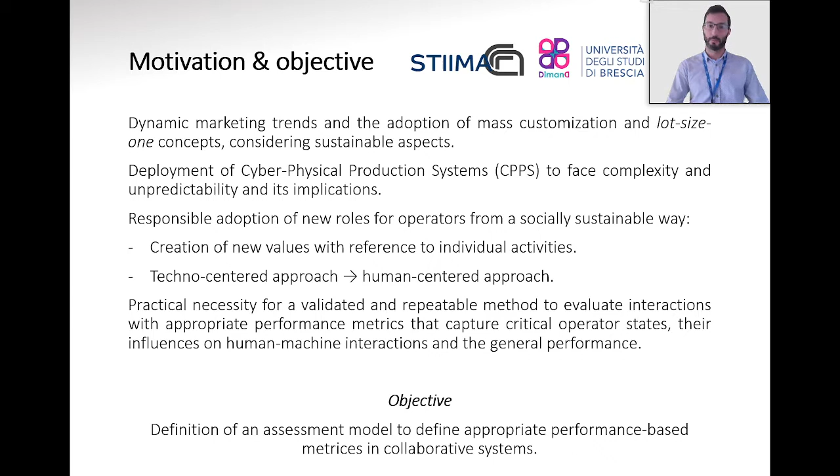That said, the main objective of this work is the definition of the model that helps establish performance-based indices in collaborative systems. Even though the approach might be applied to any collaborative CPPS scenario, we focus on collaborative environments implemented by collaborative robots for the physical interactions.

The model we propose is divided in different dimensions: the user, the machine, the collaboration, and the performance indices important for the production. Following slides will explain in detail all these dimensions and why they are important when setting performance indicators, and a practical point of view, which might be understood as how feasible it is to measure them.

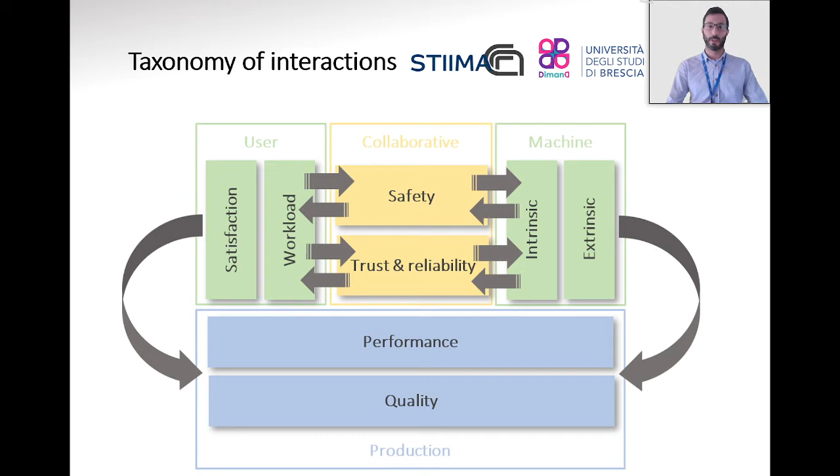Firstly, according to the user dimension, the context plays a major role since it establishes the engagement of the operator with the specific task. Then we can define the operator fatigue as one of the main factors that influences productivity and safety, and is directly related to the balance of workload while preserving the situational awareness.

Workload can be classified in physical and cognitive, or computational when considering artificial systems. Physical workload can be easily measured by monitoring physical operations, but cognitive monitoring is not easily addressed.

Situational awareness is defined as the ability to perceive what is happening around to predict what will happen in the future, and is driven by the supply of attention resources, their demand, and the operator's understanding of the task. It results in internal challenges of mental models and has a strong effect on the decision-making process and consequently on the production performance.

According to this dimension, different approaches can be used to measure these indices, like the multiple resource model architecture, the situational awareness rating technique, or the widely known NASA TLX.

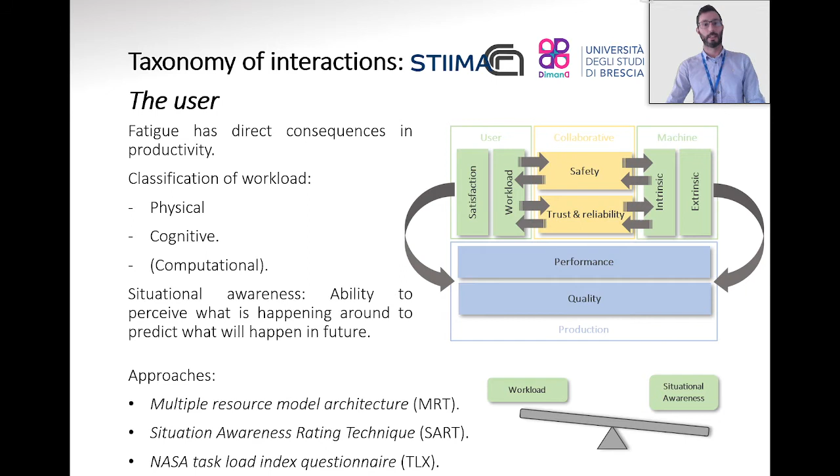According to the machine dimension, we might classify main indices in global or local, kinematic or dynamic, and intrinsic or extrinsic to the task that is performed. Challenges arise from the proximity to low performance configurations or singularities and the effective use of the workspace.

Some of the main indices are joint performance indicators, manipulability indicators or redundancy, and isotropy and task related, like the ellipsoid isotropy or the layout conditioning index, and others.

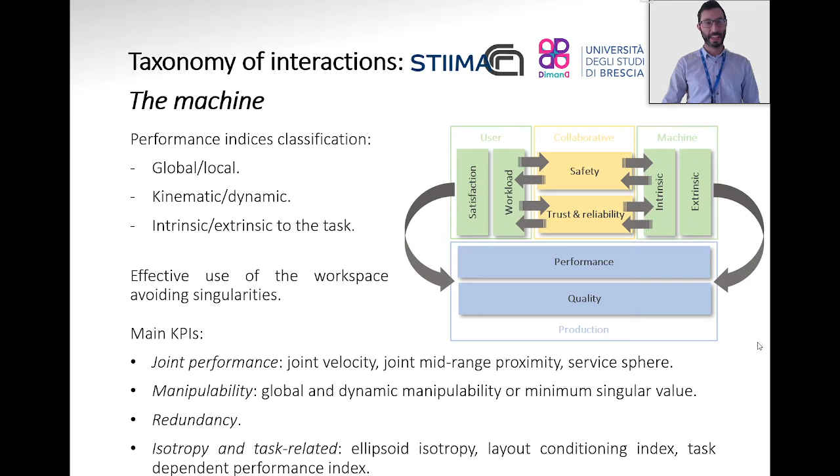Trust is the main pillar in collaborative interactions and is defined as a cognitive attitude that holds the belief that the collaborator will perform as expected to accomplish the main objectives. An improper calibration of trust produces system disuse, misuse, and may cause accidents.

However, the importance of trust is also due to the sources of its creation, which might be human-related, like the abilities and personal characteristics, robot-related, such as the performance or attribute factors, and from the environment, like the collaboration and task-related.

Some approaches to measure trust suffer from intrusiveness by using questionnaires and then affecting the results, or the use of automatic psychometric instruments. This last approach is quite promising, but the dynamic behavior and long-term changing nature of the familiarity process challenges this method.

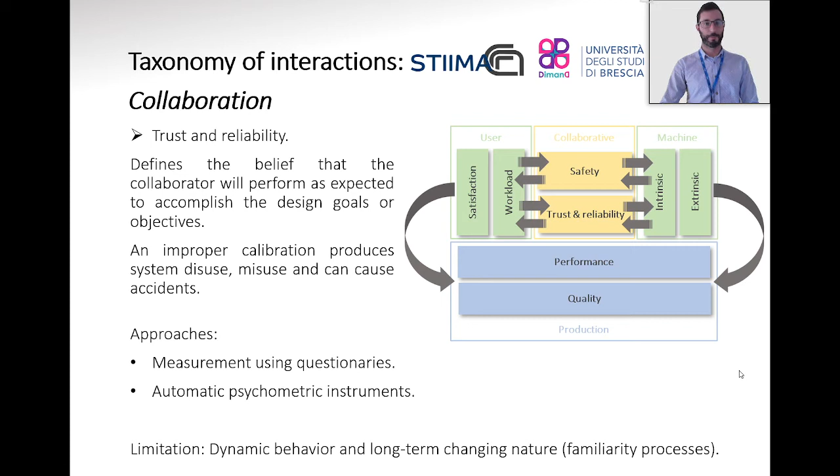Safety is of high importance in collaborative systems, especially on those with close physical interactions, as we can see in the number of standards that define this interaction. From the practical point of view, risk and hazard identification methods, especially those which assume human actions, are of special interest to identify potential unsafe situations.

Then, advanced verification and validation methods assure continuous monitoring of unsafe situations as consequence of malfunctions of the software or hardware. Even though the initial steps are important to deploy safe systems in industrial scenarios, continuous monitoring mechanisms must be considered during the operational phase as well, due to the evolvability and complex nature of the future manufacturing systems as consequence of their digitalization.

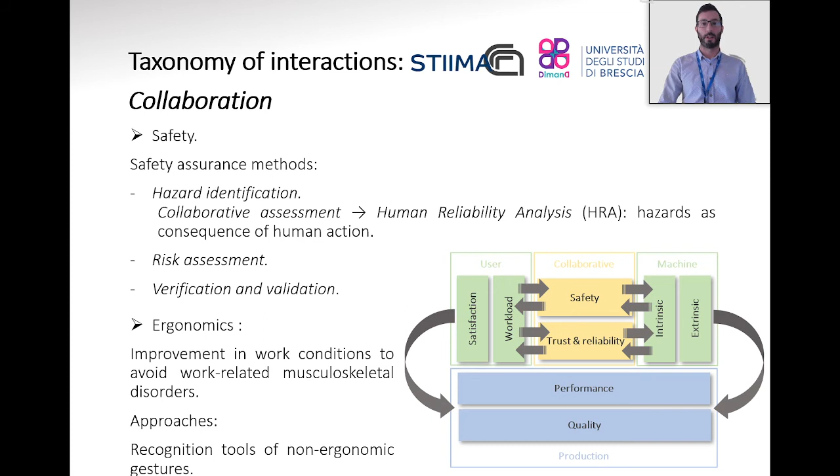Most of the production indices have been widely studied for decades now, but are mainly built around collaborative objectives. Some indicators can be established according to production rates and capacities, quality of products, or individual production line behaviors, like downtime for maintenance, or changes in tools and components.

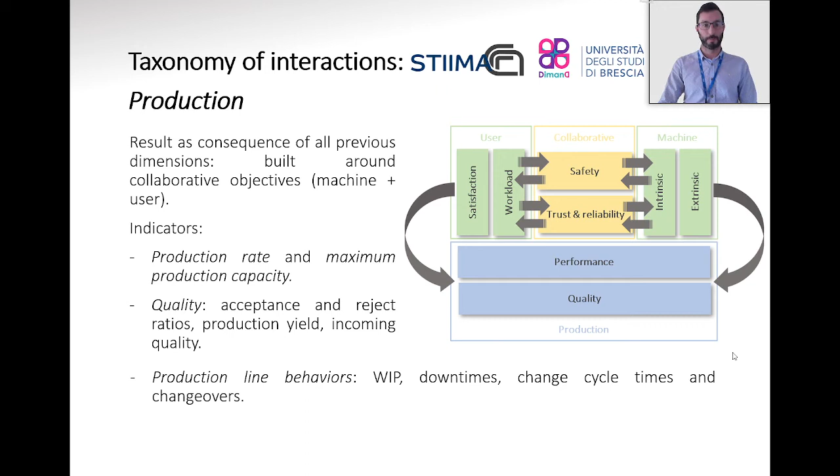To describe all previous dimensions, I would like to introduce our use case, which is created from an industrial manufacturing scenario for the production of small batches of electronic printed circuit boards. Main challenges of the automated solution can arise from the manipulation operations of flat and small objects, the wide range of product designs, and the positioning requirements.

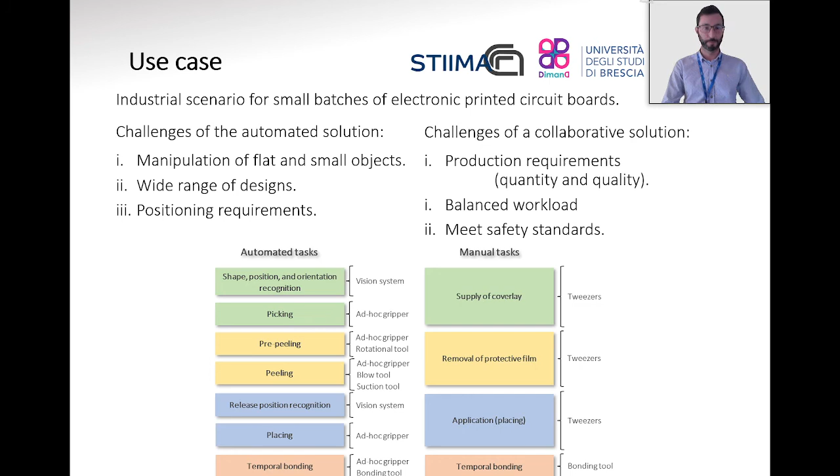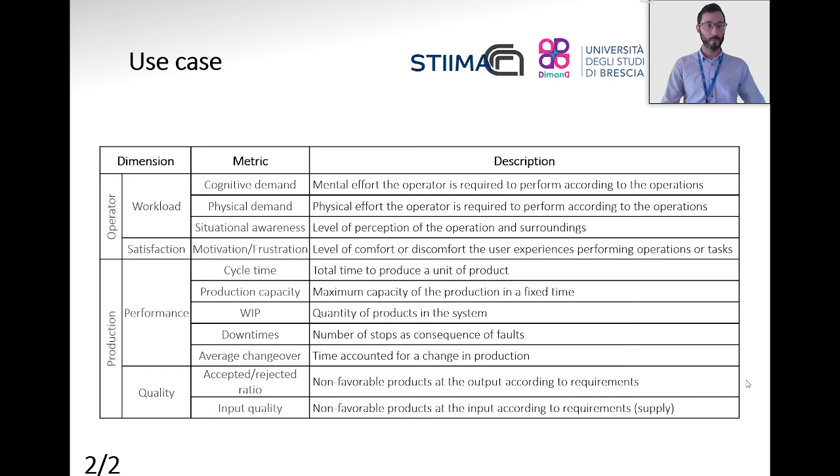In conclusion, the analysis of the implications the deployment of highly digitalized systems has in industry is of huge importance, as is a correct assessment of interactions to keep high values of performance. Trust and reliability are set as the main pillars to keep performance values high.

We would also like to highlight the importance of the context during the whole analysis, and also the variance with reference to time along the whole life cycle of the manufacturing system, not only focusing on the design phase, but also during the operational phase. Future steps will cover the analysis of the use case and how previously exposed indices will be adapted to a completely automated solution and a manual one.